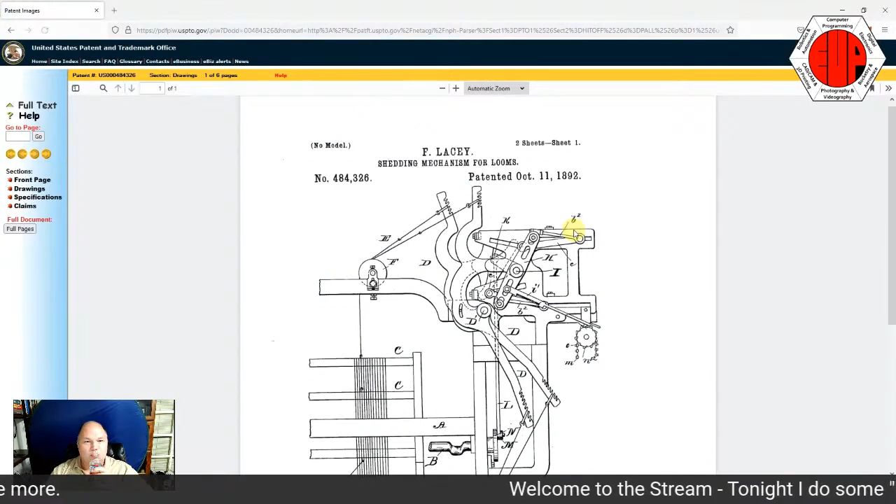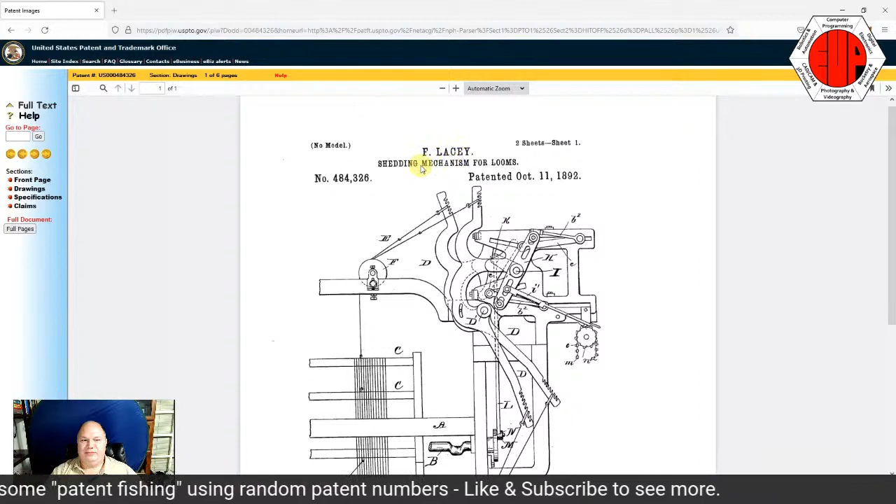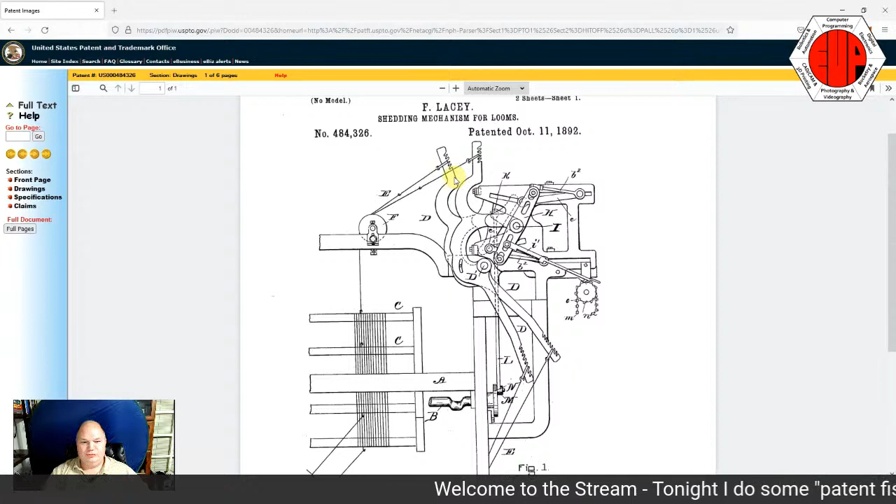Shedding mechanism for looms. So, weaving. Mr. F. Lacey makes a shedding mechanism for looms. Shedding. Not sure what that terminology means in loom world, but looks like we got a spindle of thread here of some sort.

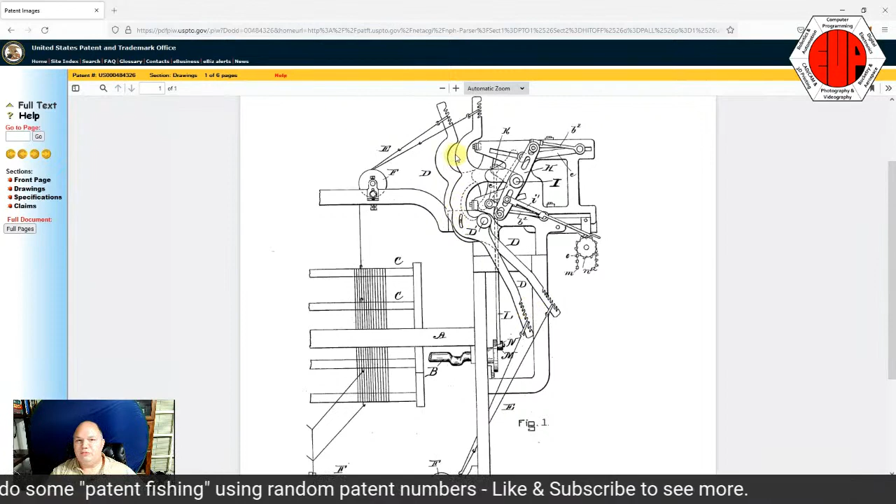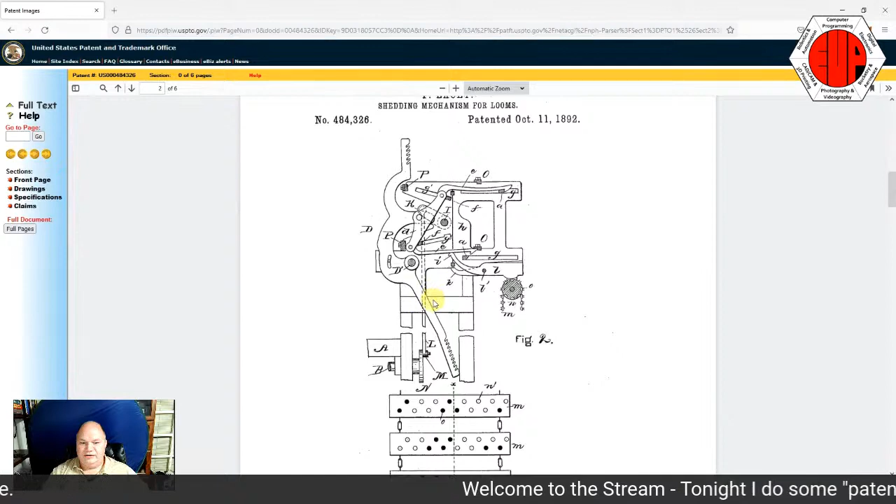Lots of moving levers. See the full pages. Shedding mechanism. Looks like it's card programmed. What's the original sort of, yeah, there we go. These are the cards. They go over this wheel. Holes or not holes decide which of these levers are pulled forward.

Shedding mechanism. Fred Lacey of Massachusetts. Shedding mechanism for loom, particularly on what are known as dobbies, D-O-B-B-I. If anybody happens to see this one day and they know what any of this is, because I don't know looms and weaving all that much. I know warp and weft and that kind of stuff, but that's about it.

Let's see. In the first class mentioned, each shed in the warp is formed by moving warp threads out of the normal plane of the warp threads. Oh, okay. Oh, the shed. This is the actual mechanism that lifts one set of threads above the other so that you can get the one set of warp threads above another so that you can put the weft through.

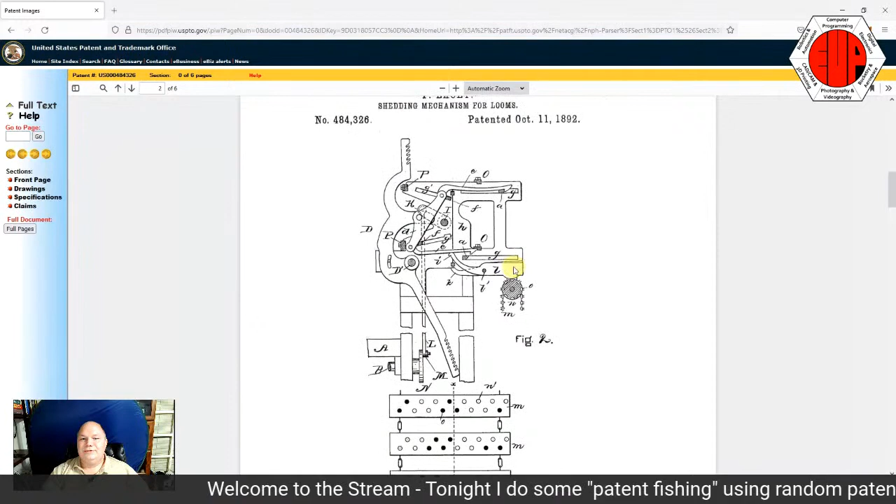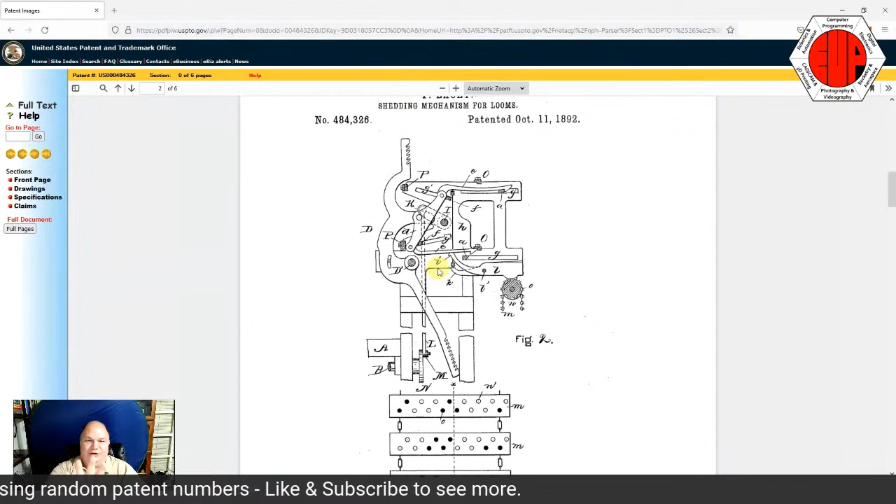So this is actually like pretty much the Babbage machine, where the cards and the holes in the cards, as played through this is a side view, determine which warp threads are lifted. And this whole mechanism is one of several hundred, usually. That's pretty interesting.

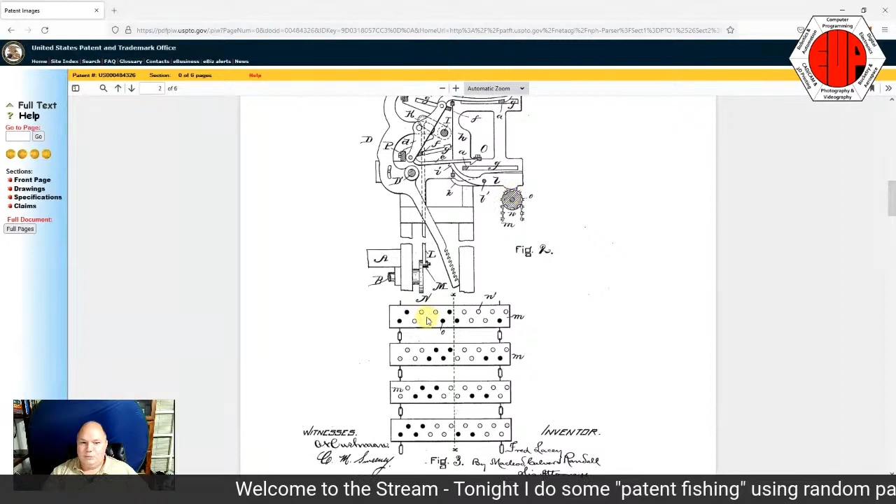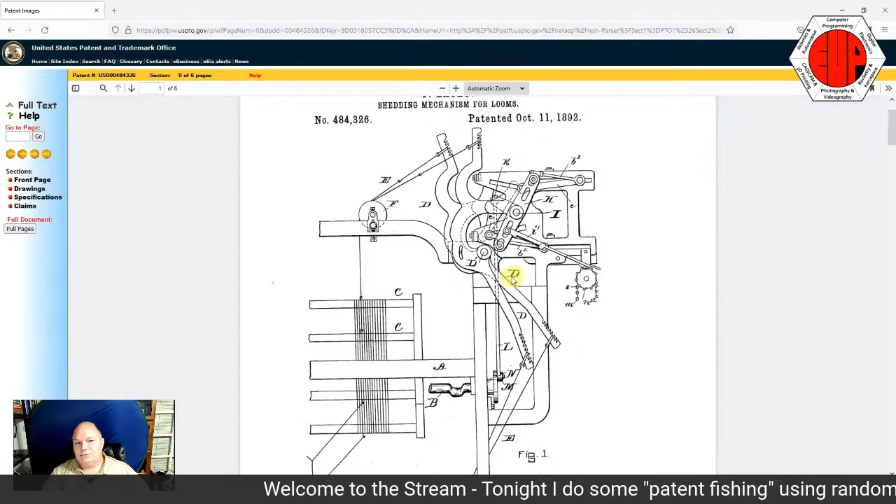So, whether there's holes or not, this little lever goes up or down. And that would control this. There you go. There's that lever. Rotating here. Yeah. And then I suppose, oh, I see. I get it now. There we go. So, little confusing. This is the frame.

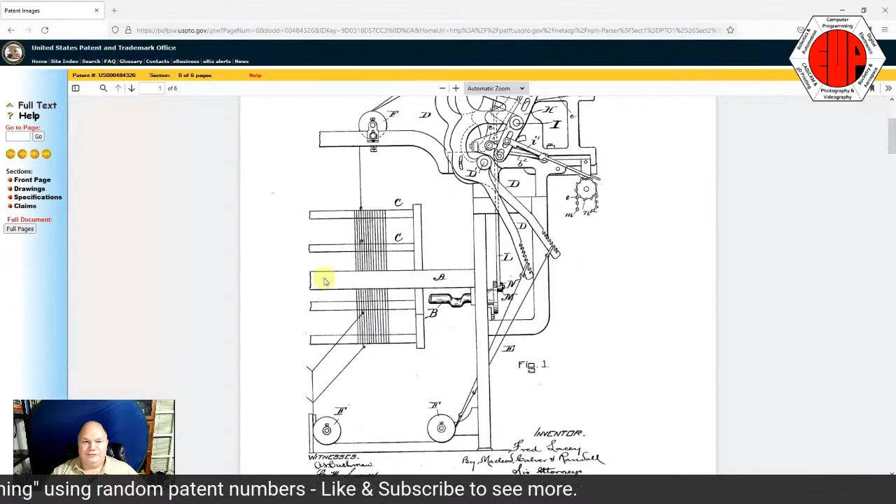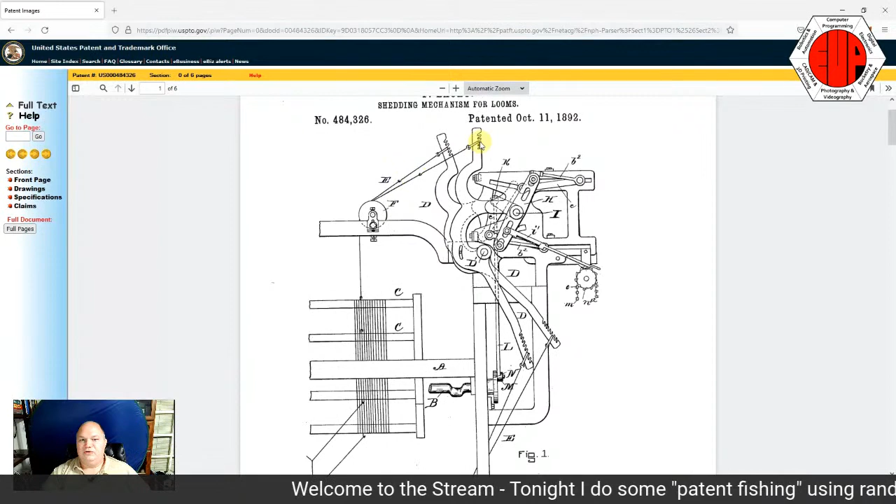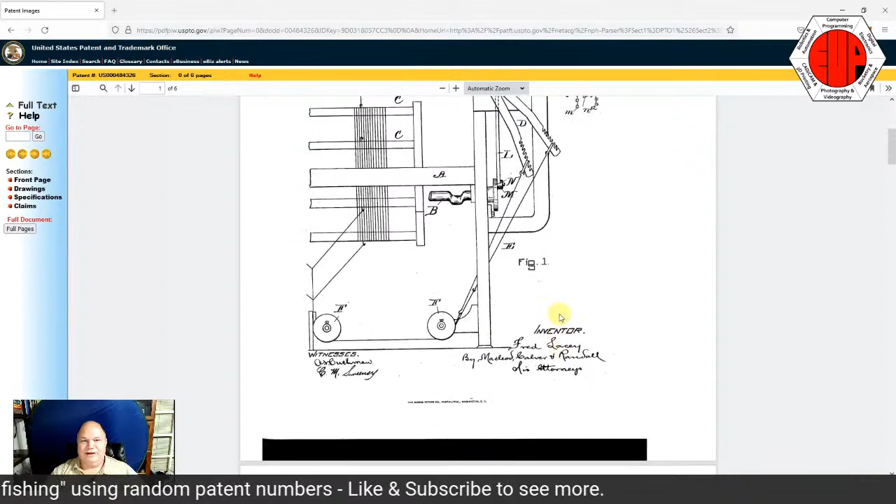These are the separators between the warp threads. And you are picking up individual frames of warp threads based off of the programming on the cards here. So it'd be like a tartan pattern or something like that. So this actually may not be a whole lot of levers, because you may only have 6, a dozen different frames, but the frames are the ones that control all the.

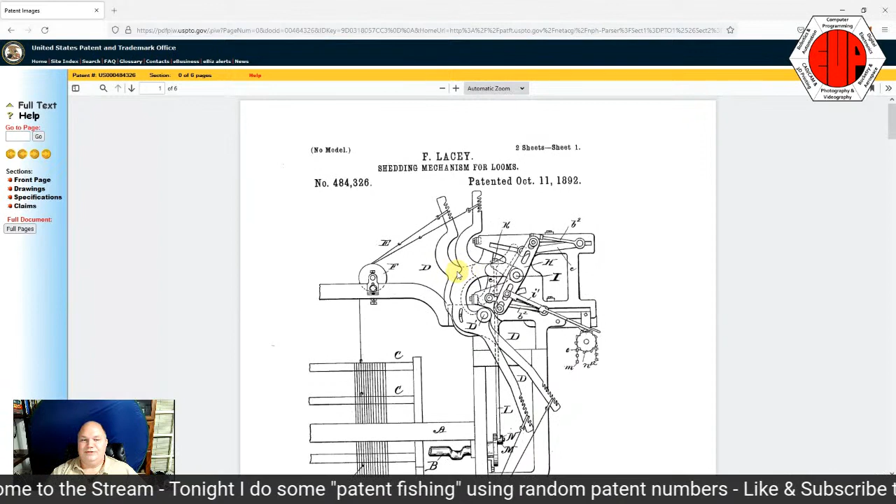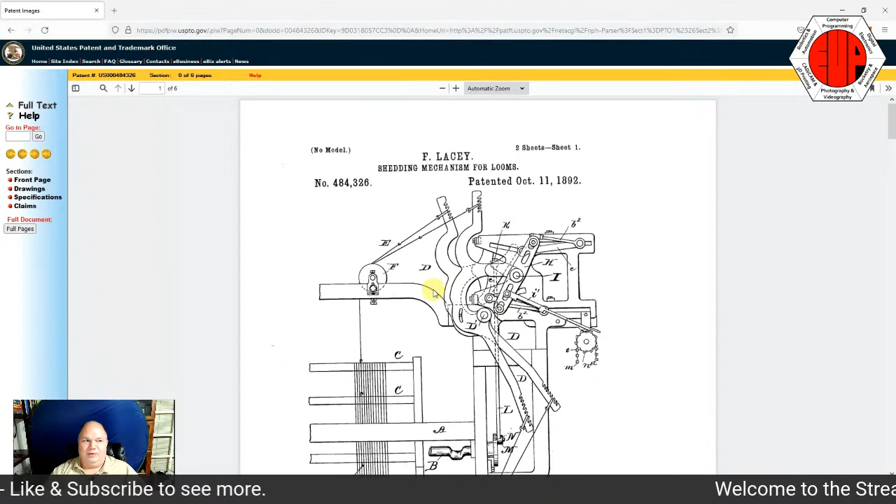So in the simplest world, you'd have 2 frames for which warp threads you're lifting and alternating them, and you end up with the classic weave pattern. But by staggering them and threading them differently, you can get all sorts of patterns.

Let's see. 1892, did he claim he was the originator of this? New and useful improvements in a shedding mechanism for looms. So not particularly new. Well, let's go check the claims. Wow, this is a longer one. Oh, he's only got 2 claims. All of that before that was the description of how the mechanism works.

So if you ever really get into looking at an old patent, it's best to print them out. It's a lot easier to have the diagram separate while looking at the description. Harness frames, harness levers, and cords connecting said harness frames and said harness levers. Hook jacks operatively connected to each of said levers, etc., etc. Indicating fingers for each harness to open the pattern bars.

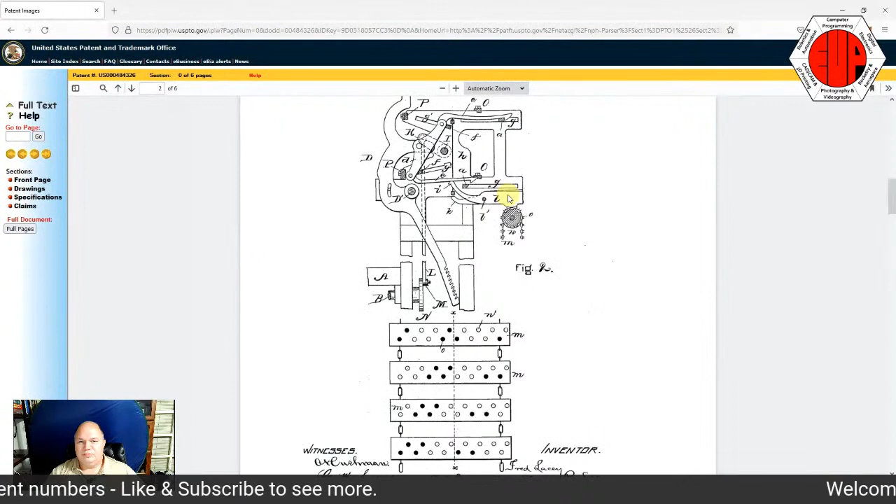Doesn't really say if it's completely unique. I mean, he kind of claims this aspect of it is unique, which I thought went all the way back to, maybe Babbage was 1892. Let's go double check.

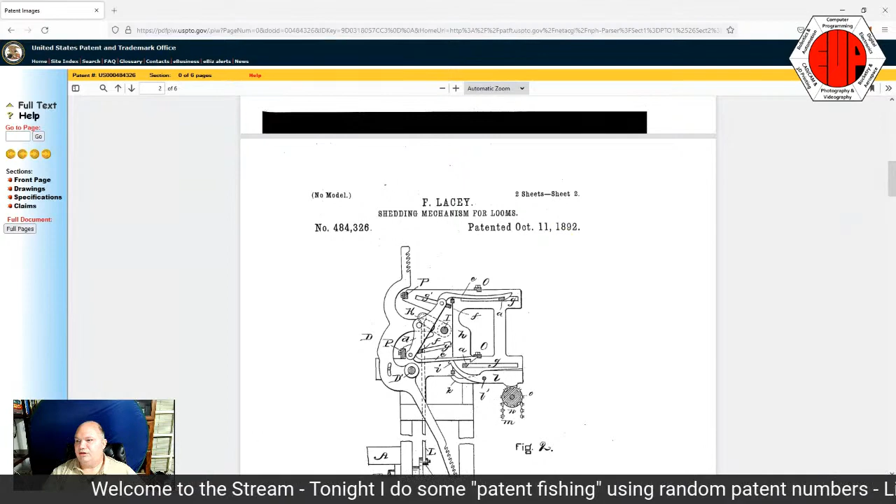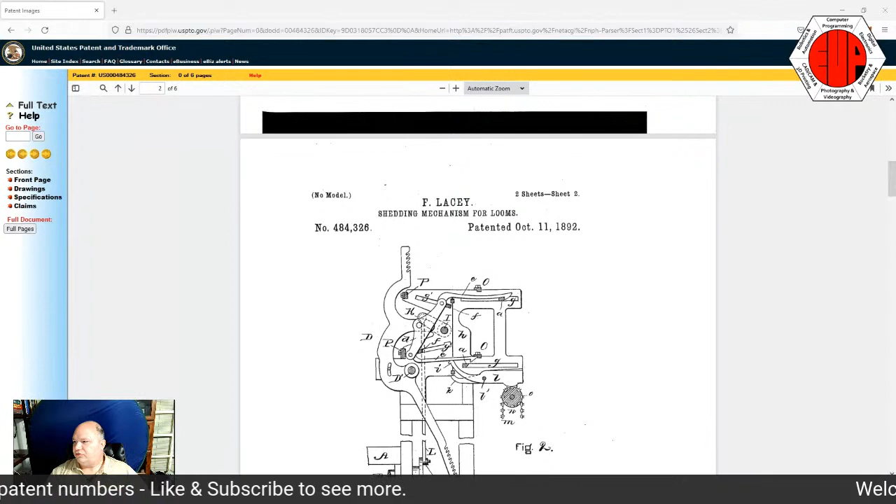Babbage loom. Charles Babbage in the loom, 1791, died 1871. So, sure enough, there's the cards that determine which warp threads to lift, and all like that. Alrighty. Cool. Moving on.